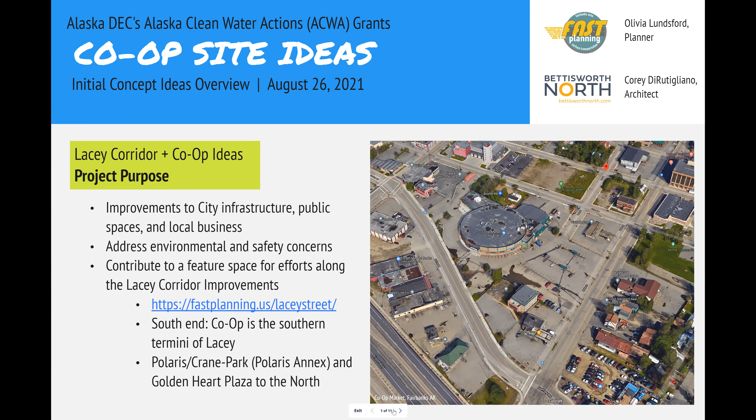Great, thanks. And we are here today to talk with you all about a project that we're working on and is really in its early stages of just kind of design exploration and thinking about potential futures for the Lacey Street corridor. This project's been going on for a bit, and Olivia will explain that a little more in a second. But we're really just starting to develop ideas and are looking for feedback. The overall goals of the work that we're working on together are improvements to city infrastructure, public spaces, and local businesses, and also addressing environmental and safety concerns. So Olivia can talk to you about why Lacey.

Yeah, thanks, Corey. So before we move on any further in this small presentation, you should know about the Green Streets Plan that is officially on our shelf as of June 2019. This is a plan that has design recommendations for road and transportation projects that are green, so to speak, or treat stormwater runoff into our beautiful Chena River. And Fast Planning was approached by the Tanana Valley Watershed Association. They had an ACWA grant in hand to do outreach on viable potential project sites for green infrastructure in Fairbanks. And with Lacey Street being in the Green Streets Plan already, it immediately came to mind because it has an extremely low motorized traffic count, coming in at 8% of its neighboring roads, making it the ideal place to start with project potential.

So beginning in fall of 2020, Fast Planning, Bettisworth North, and the Tanana Valley Watershed Association began an outreach project to garner significant public input on design possibilities. That included everything from keeping Lacey Street the way it is to implementing a linear park, or a park that would extend from one end of Lacey to the other, or any sections in between. And more information about that plan can be found on the previous slide and on the Fast Planning website. So this shows some of those ideas of the transformations that could take place there.

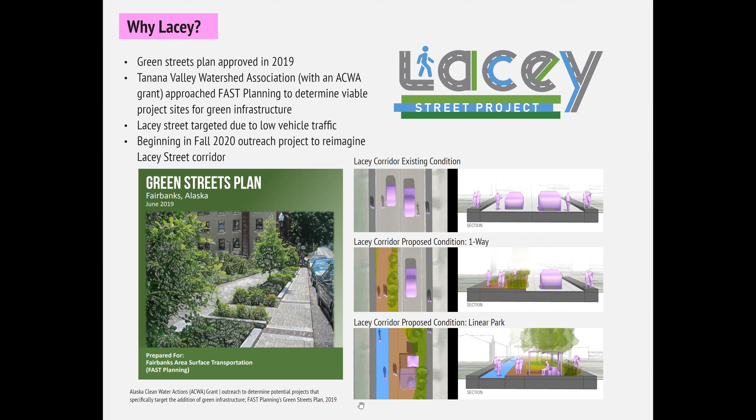So why the co-op? Well, as we know, it is sort of at one terminus of Lacey Street. We have the Golden Heart Plaza on the other end. Both are public spaces. We really view the co-op market as a public space. There's lots of pedestrian traffic that pops in to the co-op for a snack, or to visit some friends, or hang out at that picnic table. And it does pose some current site challenges, which make it an even more ideal case study between the water runoff and drainage issues in the parking lot, as well as the vehicle through traffic that Fast Planning could help temper or even mitigate. It makes it a really ideal candidate to be looking at for the continuation of the Lacey Street project.

Great. And some of those things, like we mentioned before, this is really in its early stages, but from a high level, we're thinking about safety, we're thinking about functionality, how different people get here and from where. And then also some more urban design type things, and the experience of walking up and down the Lacey corridor, and what one of the termini might feel like down here. So whether that includes more pedestrian-featured lighting, seating areas, planted spaces, and then how those might start to support business expansion opportunities, like outdoor seating areas for adjacent restaurants, like this seen down here from South Restaurant and Cafe in Anchorage.

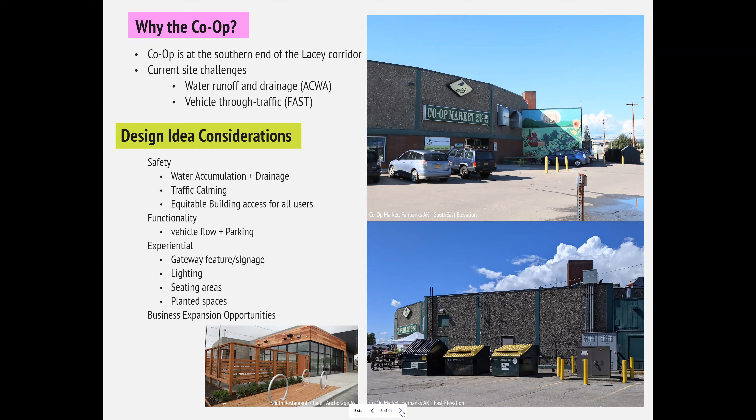And now the parcels. Olivia knows quite a bit about this. Thanks, Corey. Yeah, so I am the GIS professional, or mapping professional in-house. So this is just data from the Fairbanks North Star Borough tax roll parcel layer, and it gives us the information about what business owners are attached to which parcels. And so this map really just highlights that there are a few different business owners that we could potentially be collaborating with on this particular project. As you can see, the Astro LLC parcel does extend into the parking area that's commonly used for the co-op. And this area is also where a lot of pooling happens during the rainy season and during breakup as well. So this just highlights who we could be working with and gives us a better idea of the general area.

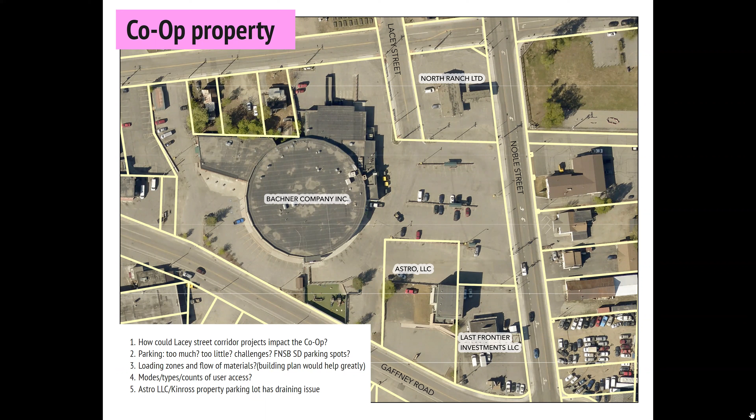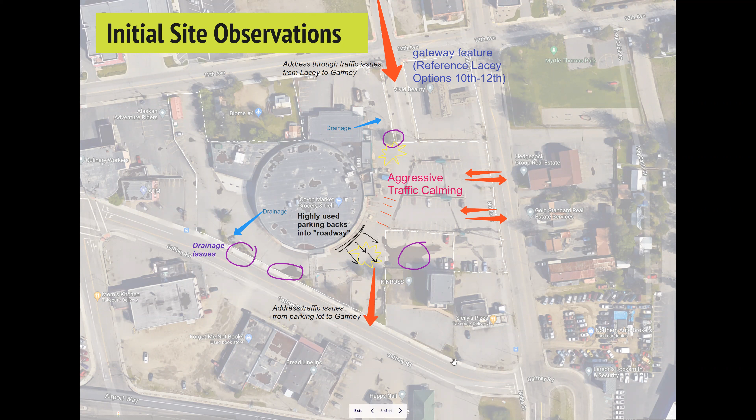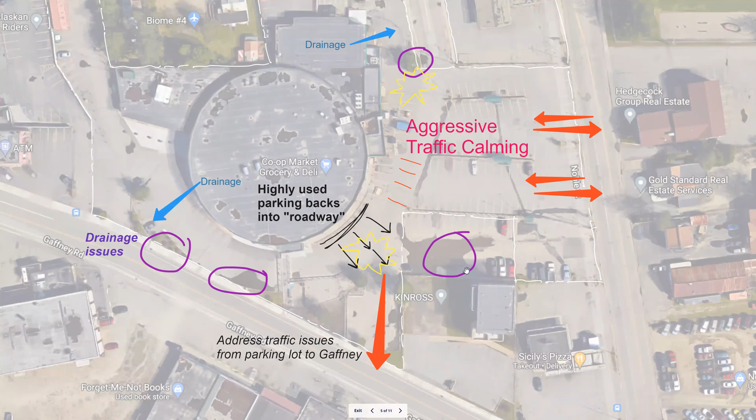So some of the initial site observations down here, and all of these are to be verified by local constituents and also any people that use the space and also property owners. But some of the things that are apparent right away, like Olivia mentioned, are that there are drainage issues in a number of different spaces. There's also traffic calming that needs to take place, and that's partly due to the fact that traffic coming down Lacey tends to cut through this parking lot and pull down to Gaffney in order to access Airport Way. And on top of that, there are areas where vehicles parking up close to the building are essentially backing into that through traffic lane. So there's a couple of things that we're looking at right off the bat, and all of this is to be really verified by project constituents and stakeholders.

So the co-op is specifically being targeted because a lot of the areas fronting the Lacey corridor are adjacent to areas of the building that the co-op is currently occupying. So there will be more extensive questions and answers as we develop these ideas. And obviously user feedback is one of the most critical pieces of making any kind of project a successful one.

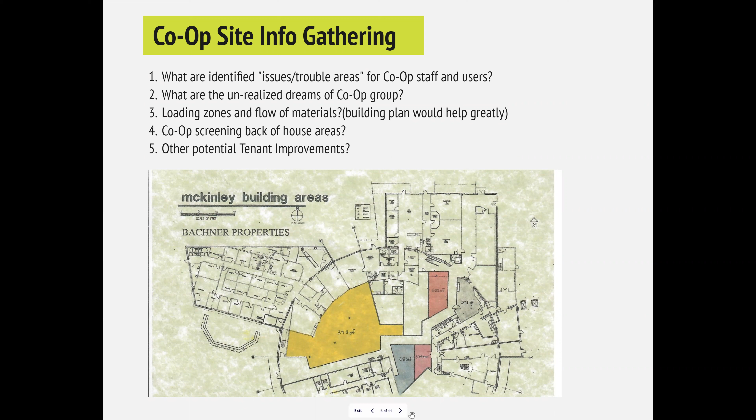So what we'll show next are a series of slides that speak to the existing conditions, and then a few really initial ideas responding to some of these challenges that we've just identified. So as we mentioned, there's through traffic occurring on Lacey Street. That may change based on what happens with the Lacey Street corridor as part of that project. There's also areas where traffic calming is right in front of the building to slow that down.

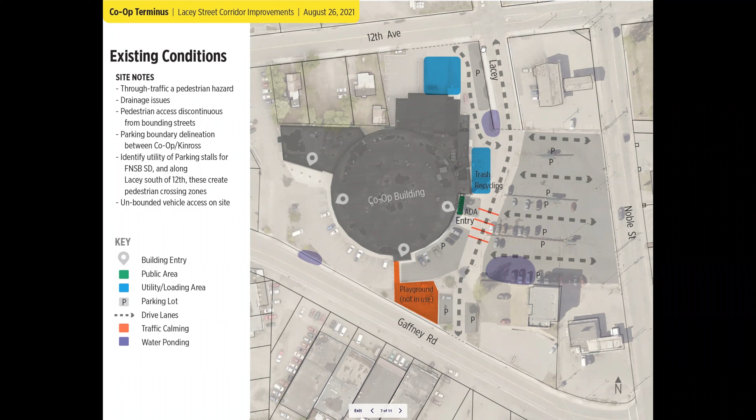There's water ponding in substantial areas, which makes it a challenge for both motorists and non-motorized uses. There's some areas that are not really in use based on the current building occupancy. And then there's just other concerns about basic access to the front of the building. There are no continuous sidewalks that lead from any of the adjacent blocks to get up to the front door here. So you're essentially traversing through a parking lot if you're going to the co-op.

So this initial idea really takes what would become essentially a one-way corridor coming down from Lacey Street and continues that down to Gaffney, but it does provide for some more substantial traffic calming. There are a lot of different methods, but one would be what's called a tabletop, which is an elevated area, and that helps slow traffic down quite a bit and helps give pedestrians a better view up and down the street as they're moving across it.

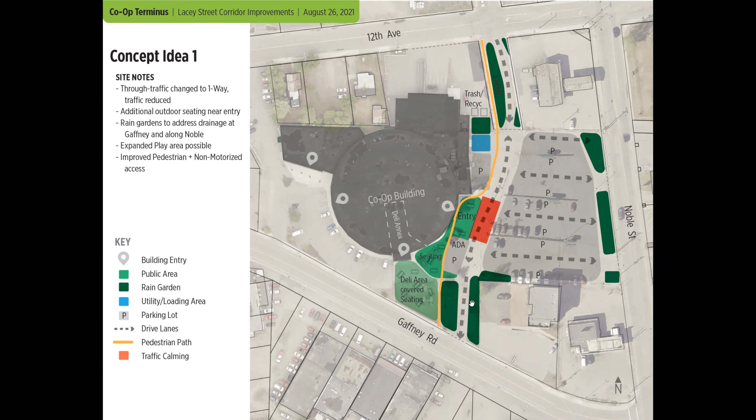Another thing is pulling some of the parking away from the building to create more substantial outdoor seating areas that could support the deli area of the co-op building or any kind of food element in there. Again, all of this would need to be substantiated by project constituents before it took place. But then one of the other big moves is these darker green spaces, and these would start to address a lot of that additional water runoff. Those would be rain gardens, and that is really the primary project goal of the ACWA funding, to find ways to divert runoff from the municipal stormwater system.

The second idea would be, again, in this progression of slowing traffic down and increasing utility to non-motorized uses and to the building, having one-way traffic come down from Lacey and then turn out towards Noble Street, and having still all of that front row parking for the co-op, but now having more pedestrian uses up closer to the building and non-motorized uses. So that could greatly expand utility to tenants of the building.

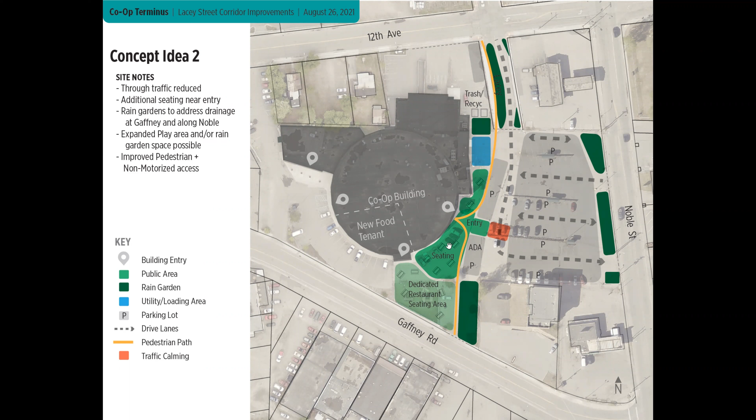Any of these modifications that are made, we'd absolutely be checking against city code for maintaining the number of required parking spaces for both convenience and by code. But really, this kind of a move would help get people safely to the front of the building. It would reduce a lot of those ponding issues, and it would slow traffic down as it approached.

And then the final idea is the further end of the spectrum, and this is in line with what was listed as a preferred option from the Lacey Street corridor, which is turning some of these blocks into linear parks and closing them to vehicular use. So in this circumstance, all the traffic would be controlled coming off of Noble Street into the parking lot area here, and would give more area for rain gardens, for outdoor seating, and again, for dedicated outdoor seating spaces for

restaurants or supporting new tenants in the co-op building here, as well as providing a number of pathways from the adjacent blocks for people coming on bikes or walking with strollers or on foot up to the front of the building here. So again, just to rehash, these are all really initial ideas, and there's quite a bit of development and information gathering in order for them to become viable. But this is the early stage.

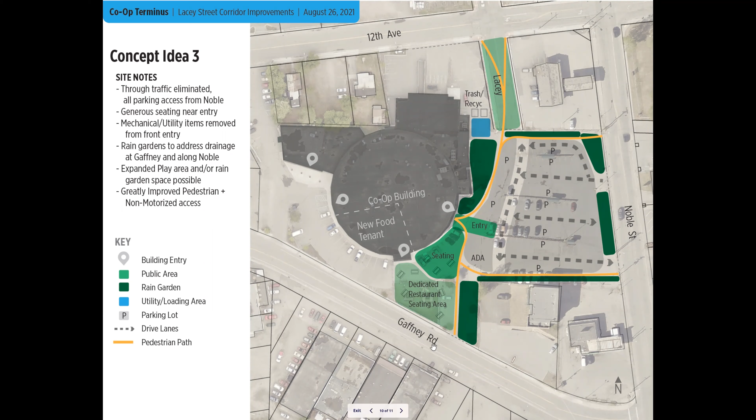So if anyone has questions or comments, please reach out to Olivia and I. We're super excited to work on this type of stuff, and we think it makes for better spaces in Fairbanks. And Olivia, do you have anything else to close with?

Yeah, I definitely agree with Corey. We're really passionate about outreach and just connecting people who have questions with people who might have answers. And FAST Planning works really closely with a lot of local entities and governing agencies in town. So if you have questions that are as specific as needing to get an answer from a government agency, we're more than happy to help you find those answers. So please feel free to reach out to us for sure.